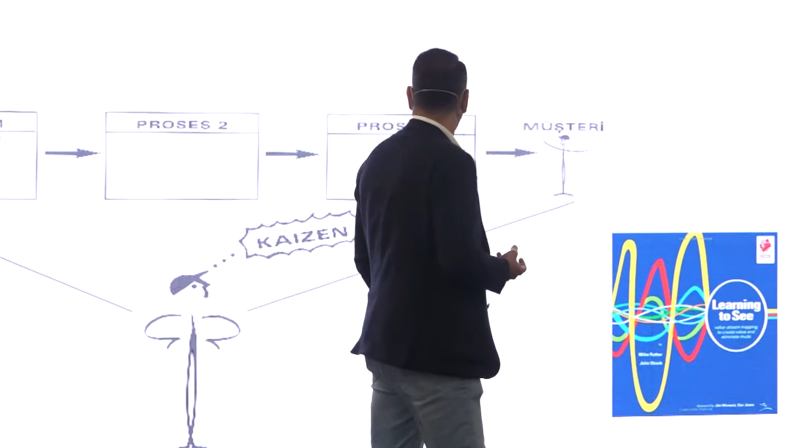Where there is a product for the customer, there is a value stream, as the Learning to See book says. Some operations are non-value added and some are value added. If you can cut some non-value added operations, you can fix your cost, your efficiency, and your quality.

Here I will mention three different aspects of efficiency. First is balancing, second is reducing the 7 wastes, and third is work ergonomics.

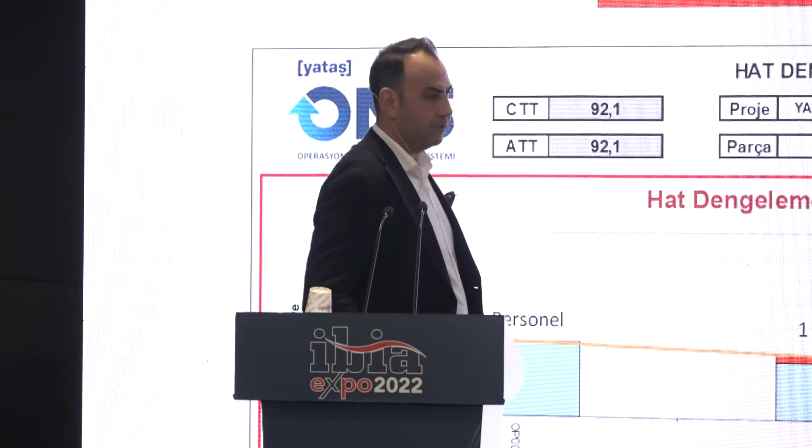So you have to look at all of your operations in detail and find what you can do. For every step, every second, you have to see, measure, and analyze the opportunities to cut or combine. Here you can see a balancing sample. Before balancing, there is a small operation with 5 employees, and you see the unbalanced points on the graphic. You have to look, as I said, in detail.

After balancing, you can see the operation goes from 5 employees to 4, and the cycle time to actual takt time ratio is 100%. So you can cut 20% from your labor cost.

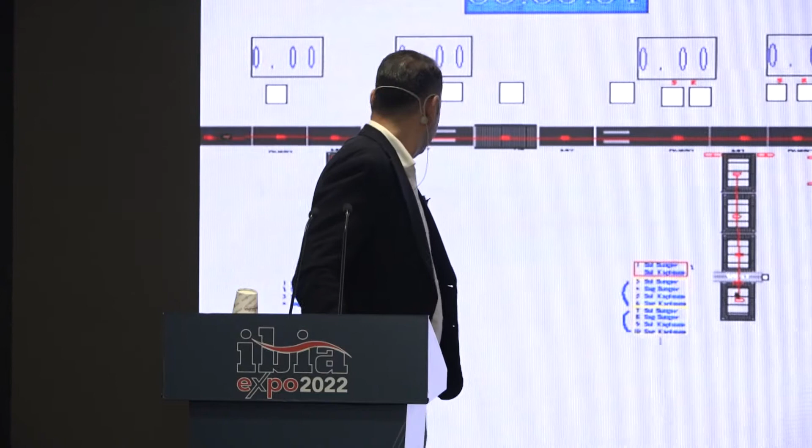Another point: yes, we said Human 5.0, but you can also use digital tools to understand and be sure you make the right balancing of your operations. You can use different software like Rockwell Arena or Visual Components. Some of them have really nice HMIs.

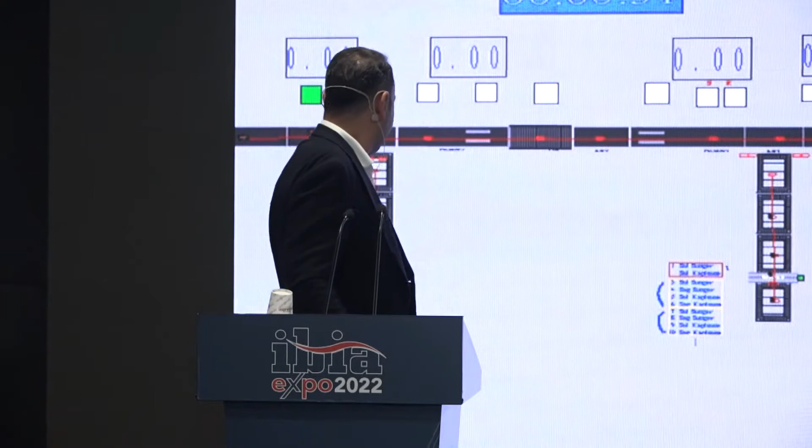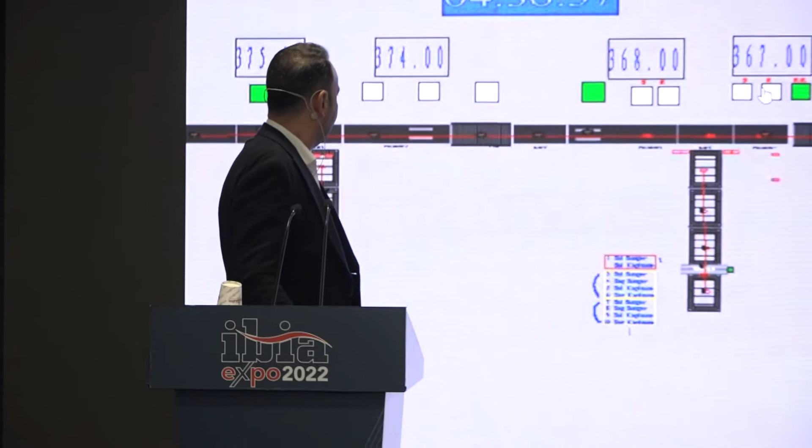This is the first simulation of our mattress line. We measured before we designed our assembly line, saw how many mattresses we can produce, and after that we signed the contract and went on to production. As you can see, it shows how many mattresses you can produce in an 8-hour shift.

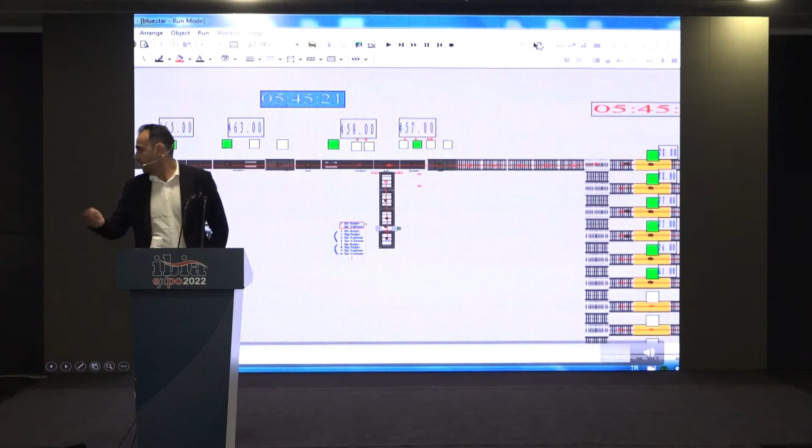The most important point after the simulation: the loading has to be equal or close for every workstation.

The second point is reducing the 7 wastes. It's a main principle of lean production, or the Toyota way. Too much inventory is a waste. Waiting is a waste. Defects and reworks are waste. Overproduction, overmotion, transportation, overprocessing, all of them are the 7 sins for production companies. So you have to look at where you are losing, which points make you wasteful and inefficient.

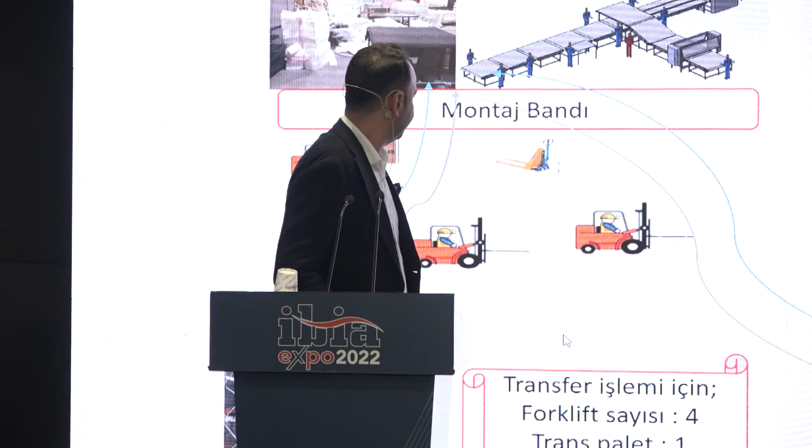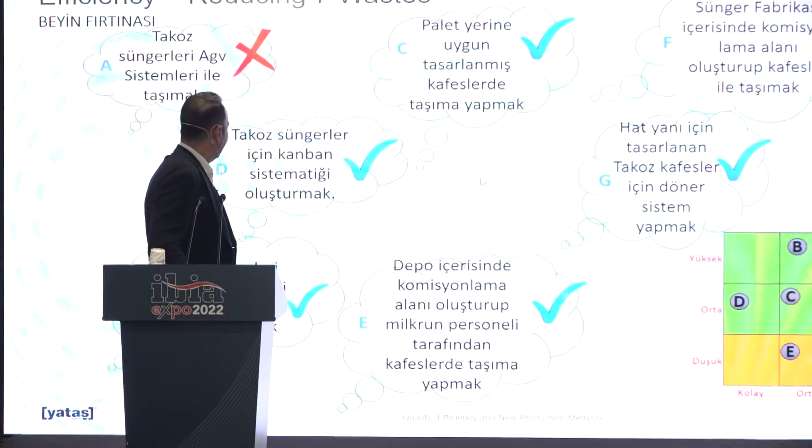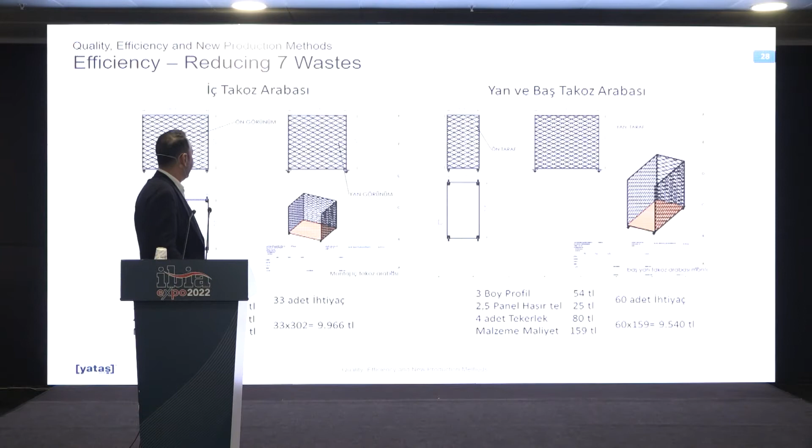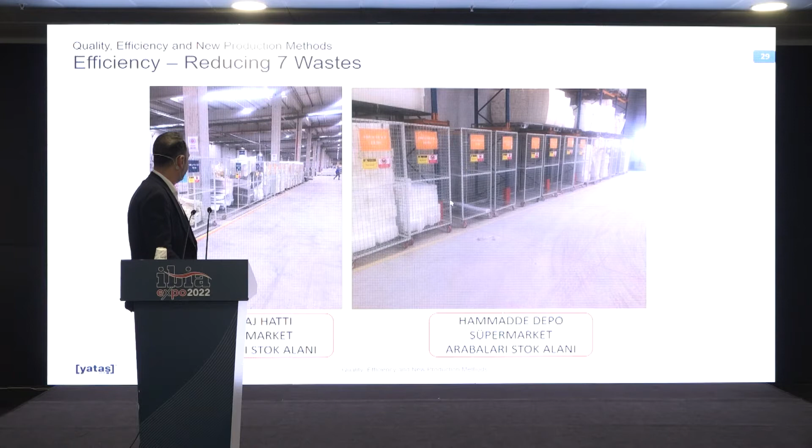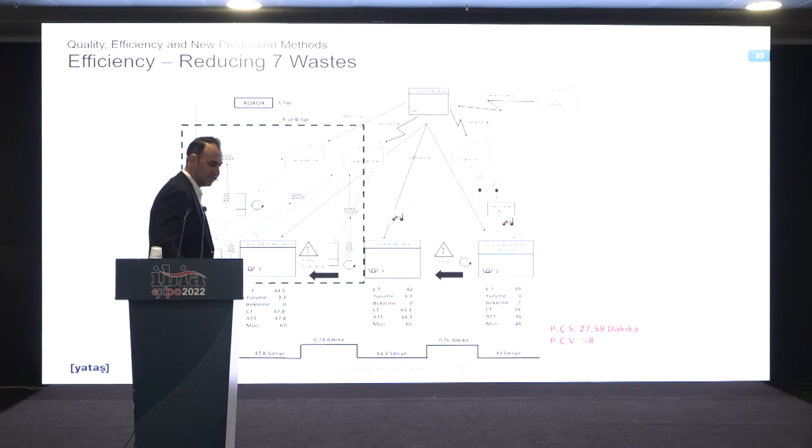At the second point, now you are seeing the value stream map for the current situation, and here is the next situation. They changed the system completely from push system to pull system. Another important point is the standard job: it means if any operation is made by anybody, every time, at any time, everybody has to do the same thing in the same way, in the same method, and at the same time. So it always aims to reduce the differentiation and standard deviation from person to person, operation to operation.

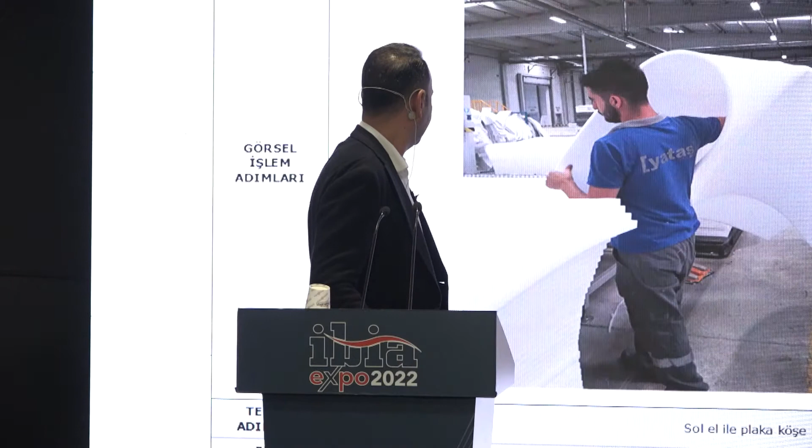And now you are seeing some of our standard operation sheets. For example, you can see what is the tip point to do this operation, where they have to be aware about the operation, what is the critical point, and what time they have to start and finish this operation.

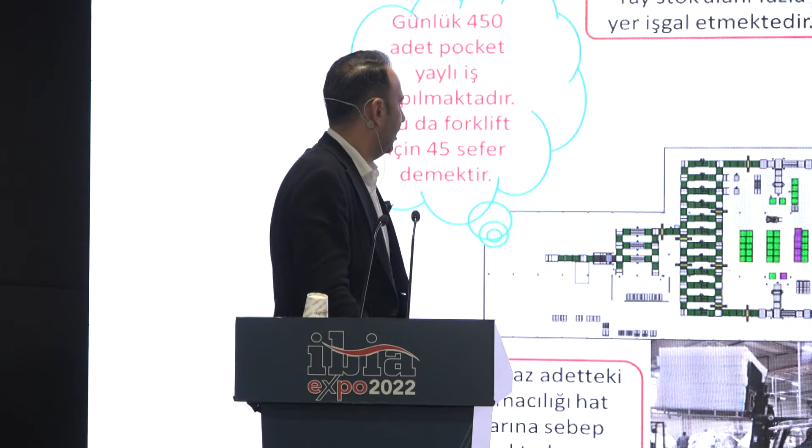Another point, they also saw a waste to move and handle the roll pack pocket spring units to the assembly line. You see the spaghetti diagram. They also made brainstorming again and found a solution to integrate a bale opener and roll opener to the assembly line. They added some extra conveyor belts to fix the operation at the same time. And you see the efficiency loss, the waitings decrease to 70% less.

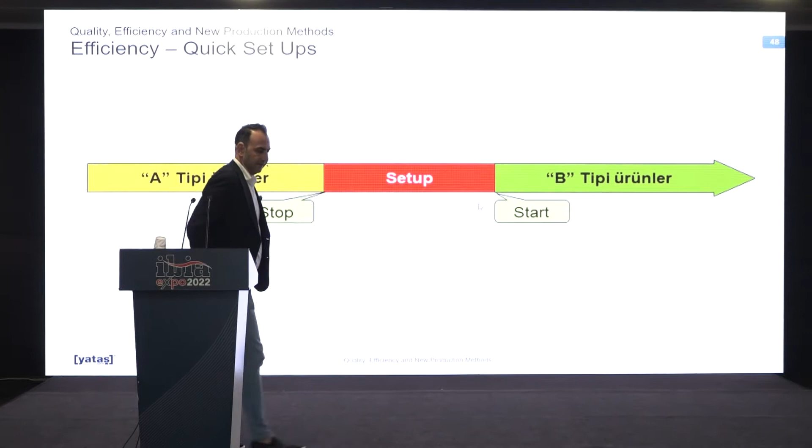The other point is, as mattress producers, all of us are serving many different markets, and all the markets need different types of mattresses. Some markets need inner spring mattresses, some need foam core mattresses. This means much more SKUs, much more models, means much more changeover and much more setup. And every setup, if you cannot do it in short time, means a break and unplanned stop.

Now I will show you a video from Formula racing. First, you will see the first video from the 1950s, and after that, you will see the new version of the pit stop at the Formula from the 2010s.

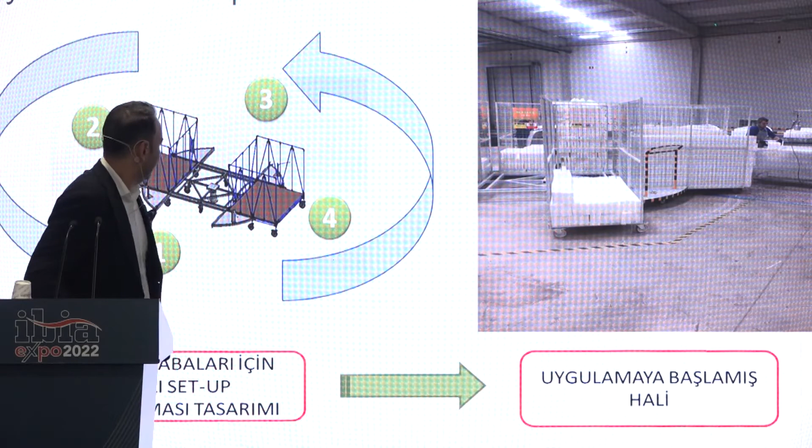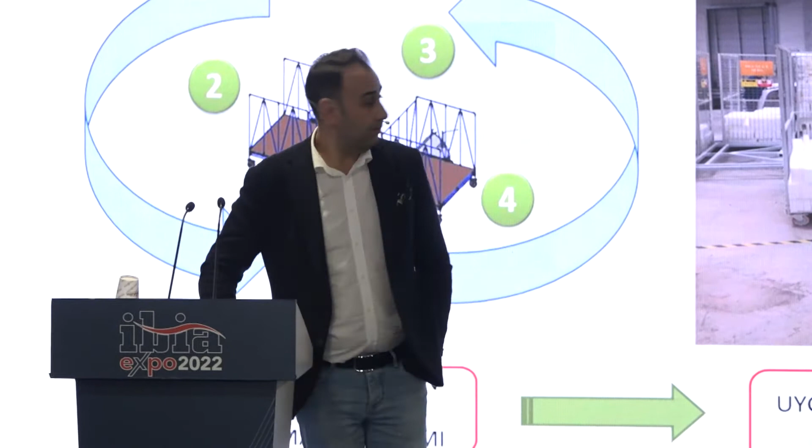So reducing the setup times and changeover times is really critical for our industry because of our product range and our product variety. We have to change from one model to another batch in seconds. So that's just a simple example of what they are doing at Yataş.

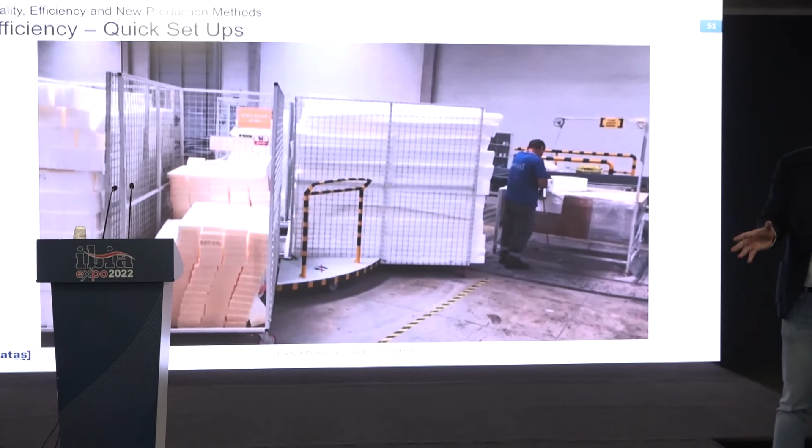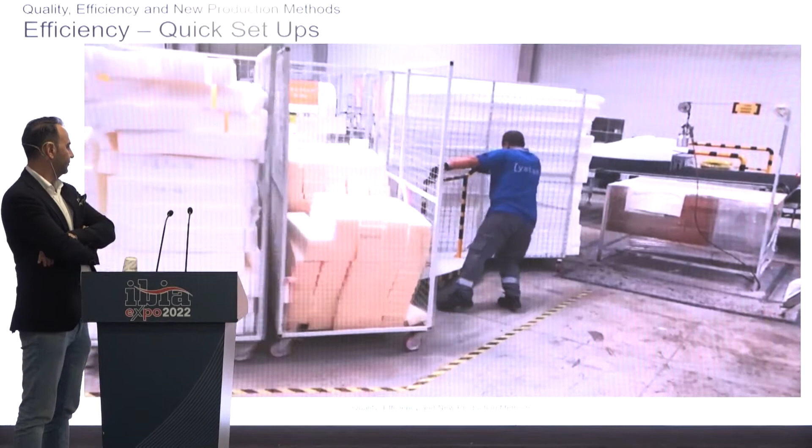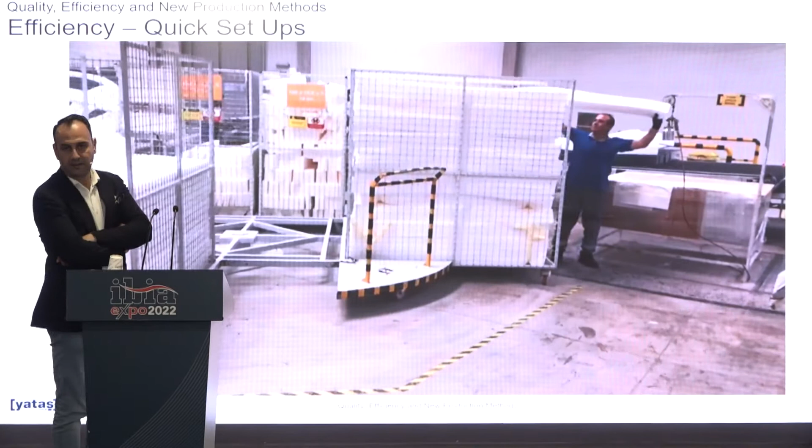We are producing 100% foam-encased mattresses. This video shows one-piece flow and also shows SMED, single minute exchange of the dies. Now he's preparing the mattress side rails, and after that he's changing to another model, another size, so he has to use other side rails. Now he switched the other batch to the other size. It's easy and lean.

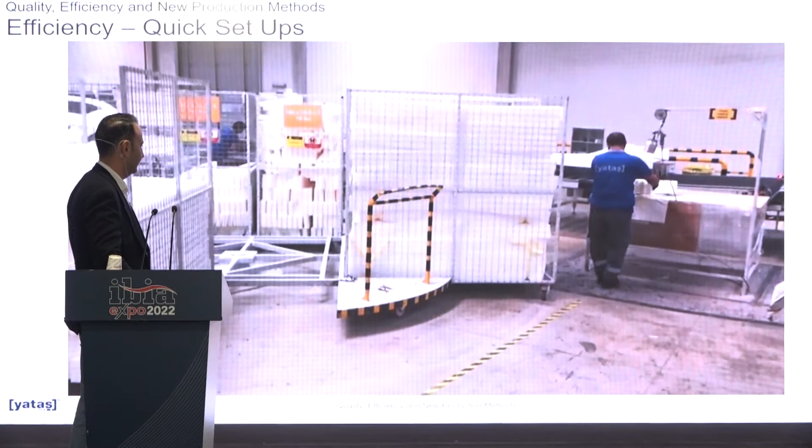Another point is we are working with really expensive equipment, and every piece of equipment has too many different electronic sensors, controllers, mechanisms, and mechanics, and you have to care about the condition of your machines for maintenance.

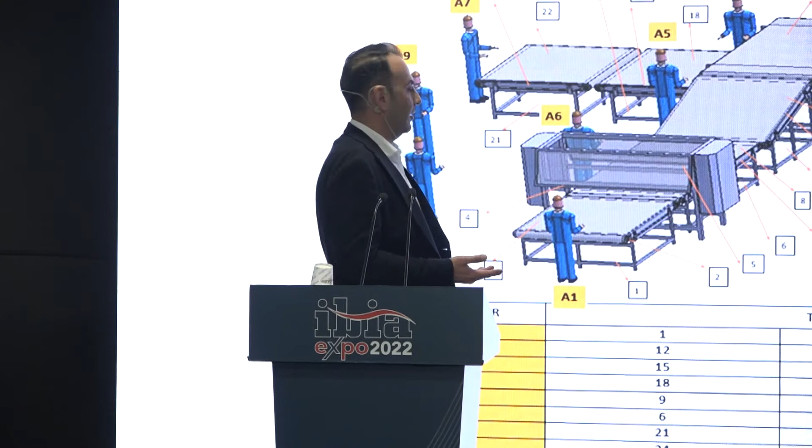With unplanned stops, breakdowns mean unplanned stops, and that means efficiency loss. So to reduce the breakdowns and broken parts, some sensor issues, if you want to reduce them, you also have to clean your machines, control the critical points of your machines, tighten some of the screws, and make regular lubrication to reduce breakdowns.

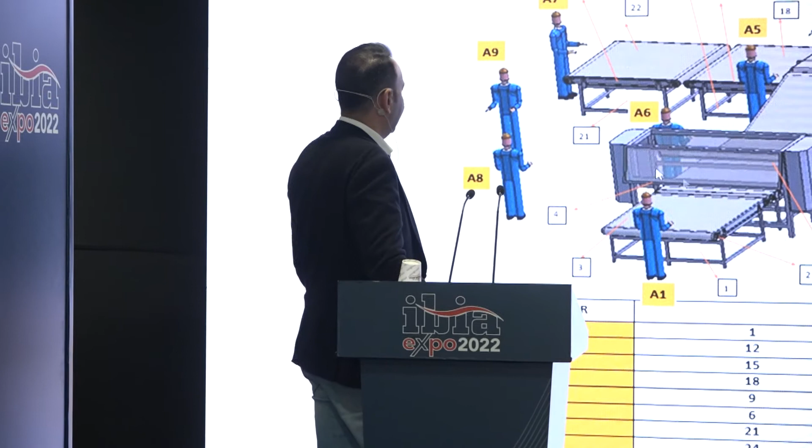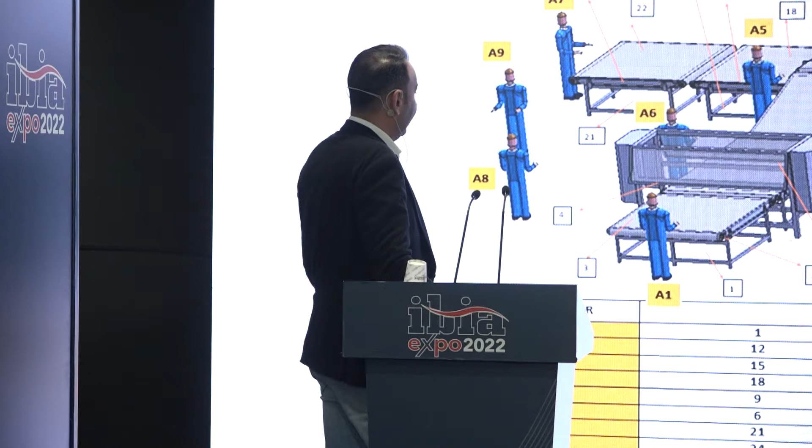And now, at this assembly line, you are seeing every person has a number, has a code, and every person, every shift, at different days, has to clean different points, check, control, tighten, and lubricate different points at the assembly lines.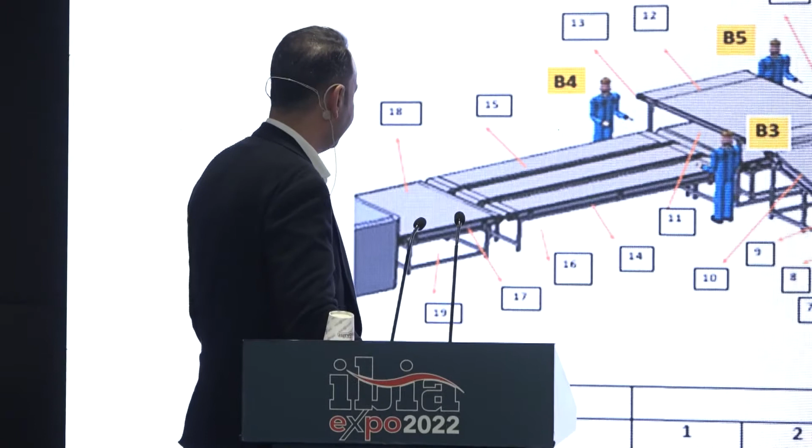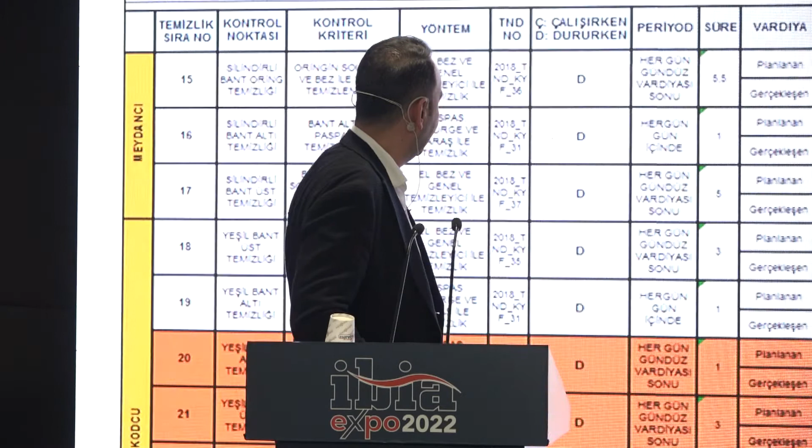We are detailing all these points, how they have to clean, what they have to use, and we are giving detailed one-point lessons. You see the trend of these timing lines, how that's going. And also another point is escalation.

If there is any break, if there is any unplanned stop, there is an escalation chart to inform at a path. Lord Kelvin says, if you cannot measure it, you cannot improve it. And Peter Drucker, the famous management consultant, says, if you cannot measure it, you cannot manage it.

Manufacturing execution systems and IoT, also Serkan mentioned at his presentation, are really important for us to see. We are collecting data from our production lines, and also another point, we have an andon button. If there is any abnormality, if the person sees any abnormality, he is pushing this button, and we completely stop the line. We have a horn and a lighting, and the supervisor of the line goes to that point and asks, how can I help you? We call it stop for don't stop.

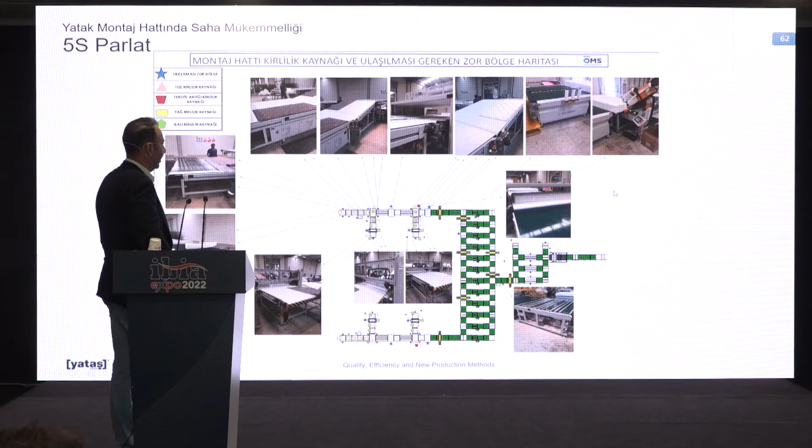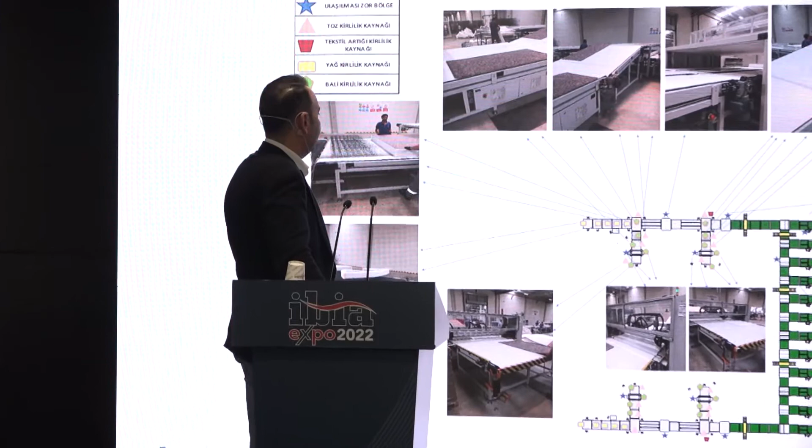Here you are seeing a map at which point of our production lines, what kind of dirtiness sources we have, and we are measuring how many minutes we are expending to clean these points and to control these points, and our aim is to reduce the source of the dirtiness.

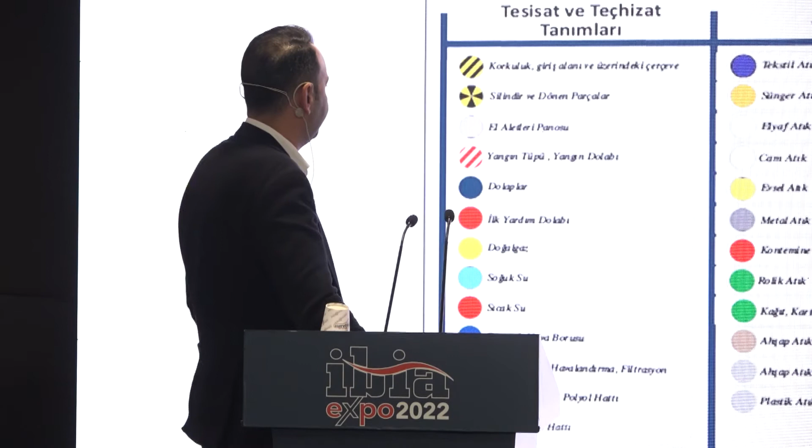Here is another example, and this is our visual plant standards. Some of the examples from our 5S applies.

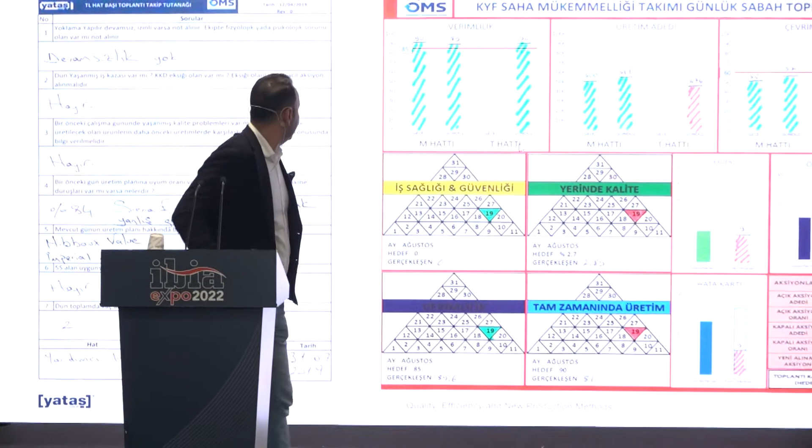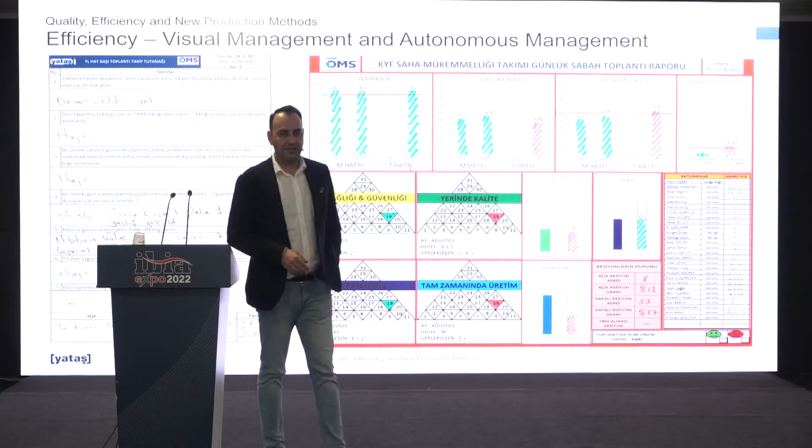And also another point, as I mentioned before, visual management and autonomous management. We are collecting data and we are looking at reports and talking about it, what we can do together to solve and do it better.

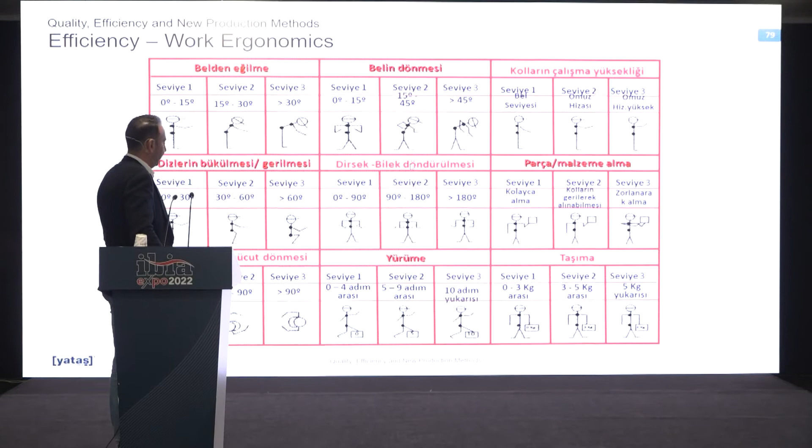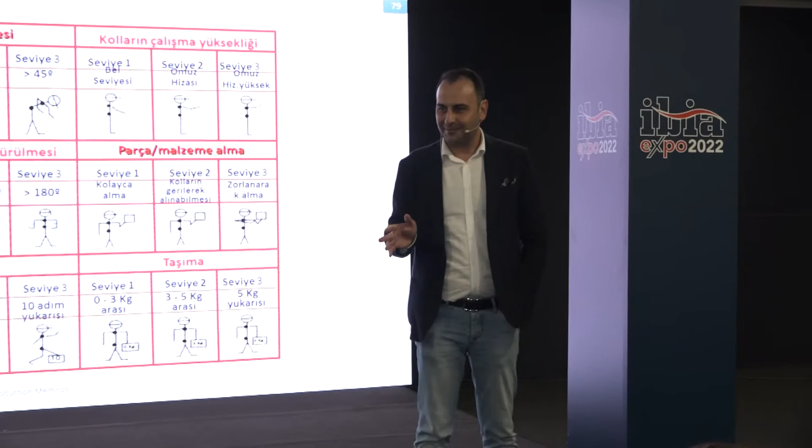And another point is work ergonomics. Yes, as the mattress industry, we are better than the furniture industry. We have much more automation, much more automated products and machines. But we are still using too many labor and manpower. So ergonomics are so important.

You also have to look at all of your operations from the ergonomics perspective. As you can see from this chart, every motion, every position has a hardness point, and you have to look at your operations.

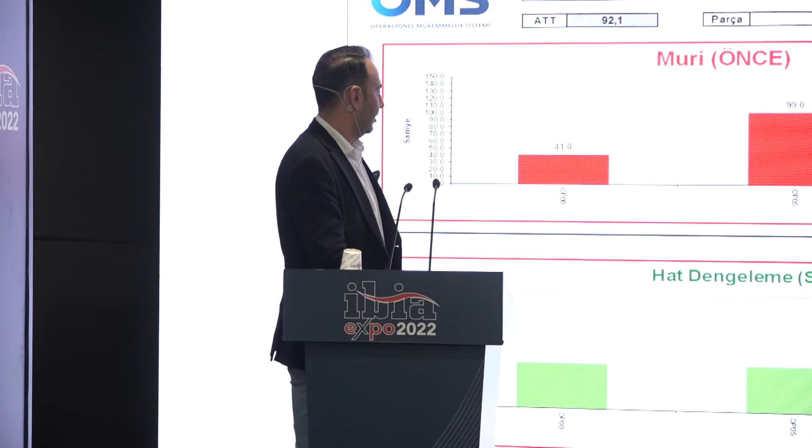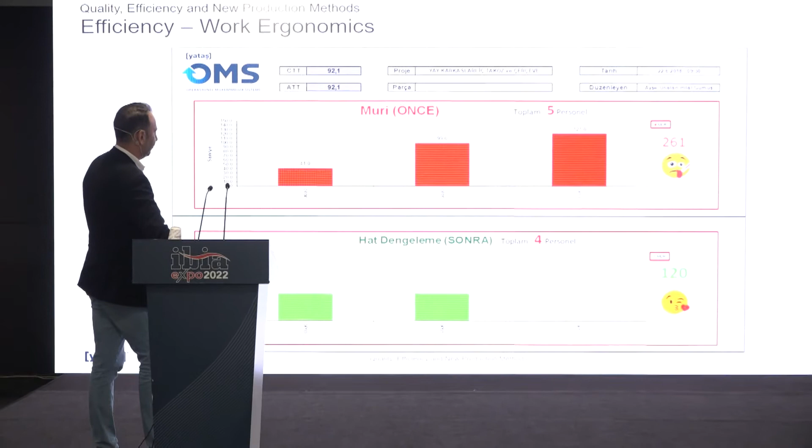This is before the improvement. The total score for these three operations was 261, and after the improvement, we came down from 261 to 120, and we balanced the hardness of the operations at every station to the same level. We also eliminated the third operation.

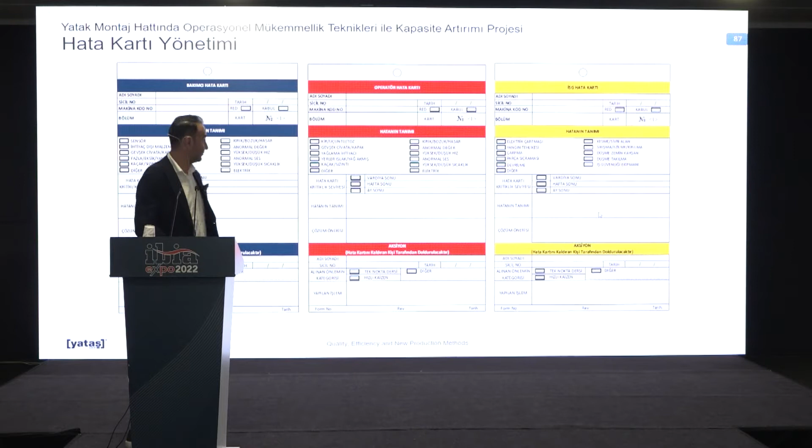Another point is autonomous maintenance, also called TPM, total productive maintenance. These are the fault cards. We have three different kinds of fault cards: the blue ones are for the maintenance guys, the red ones for the operators, and the yellow ones are about health and safety for the labor. These are the most important ones.

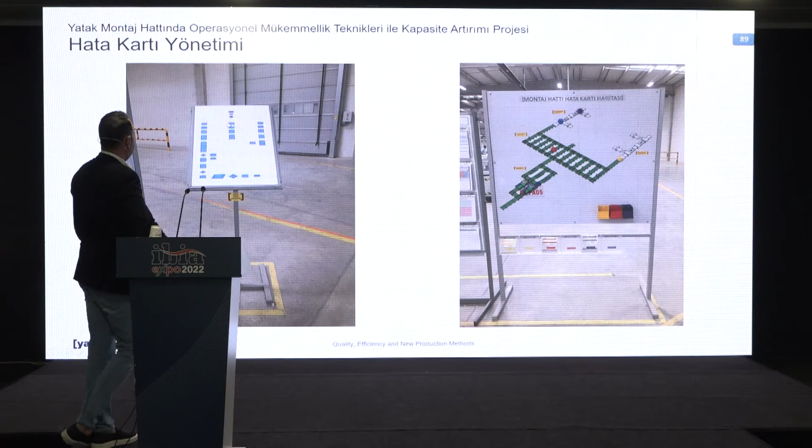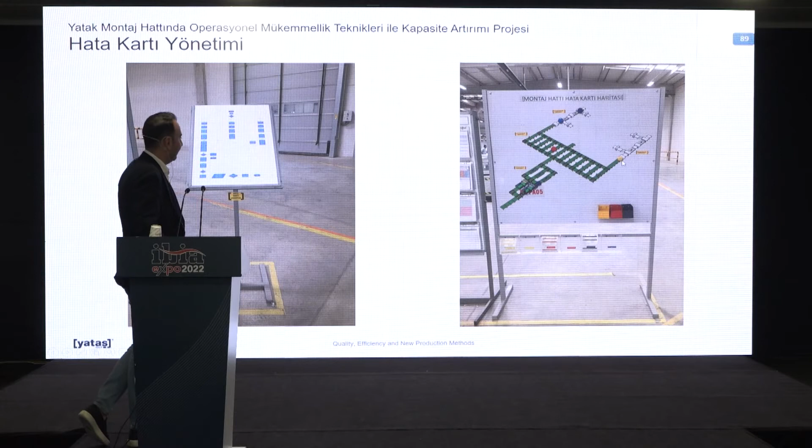We have to solve the yellow ones on the same day. We are using these cards, hanging them where we see the problem, and also pointing from the layout. Now you are seeing 1, 2, 3 maintenance fault cards, 1 operator fault card, and 1 health and safety fault card. This is when we hang the card and when we unhang the card, as you see in the graphics.

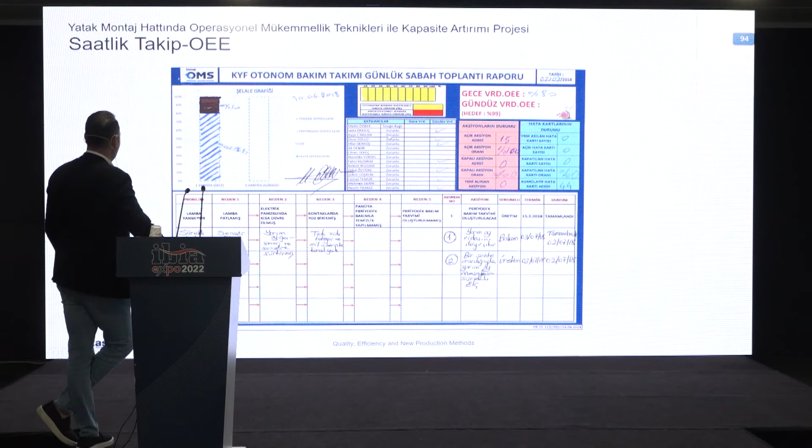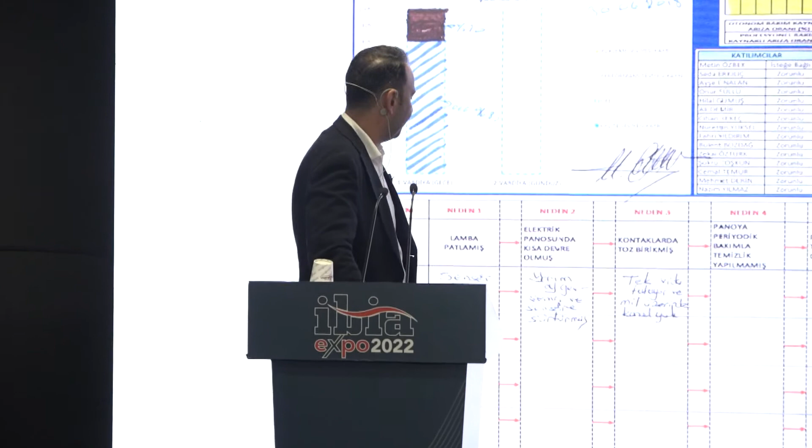We also have to talk about maintenance and breakdowns for the machines. We are talking every morning about every problem with the maintenance. If we had a problem, we always ask why 5 times. The aim of this 5-why analysis is always to find the real source of the breakdown.

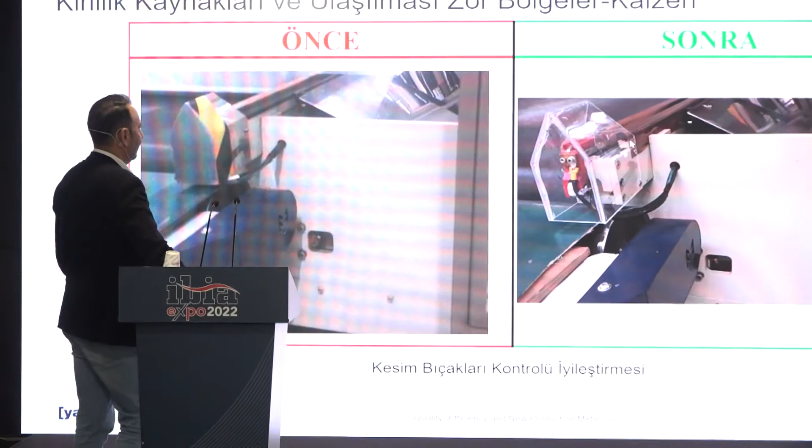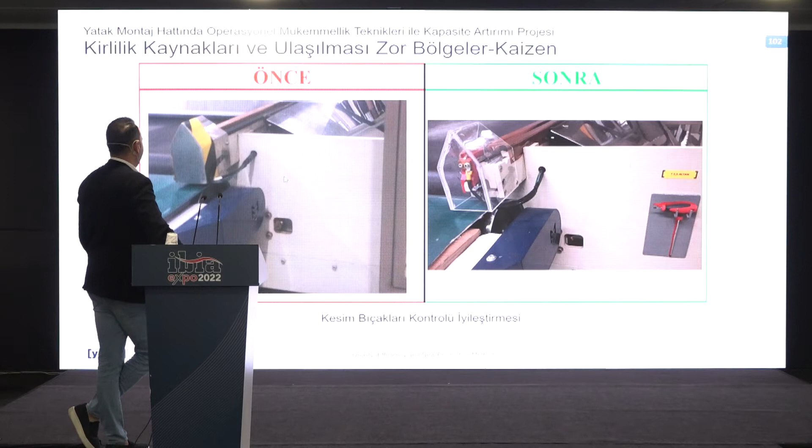There is another Kaizen. Before, we could not see the inside of the knife unit, and if there was a problem with the angle of the knife, we couldn't sense it before it became a problem. But now, if there is a problem, we can see it.

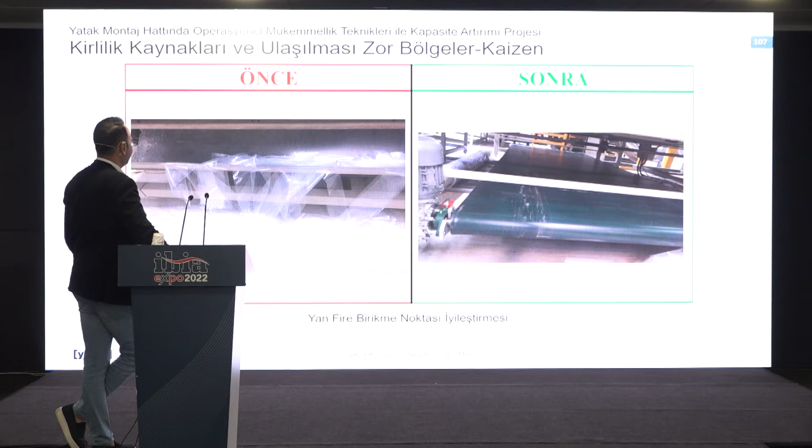This is another Kaizen to keep the bottom side of the machine clear. This is a Kaizen to collect the side waste of the polyethylene film.

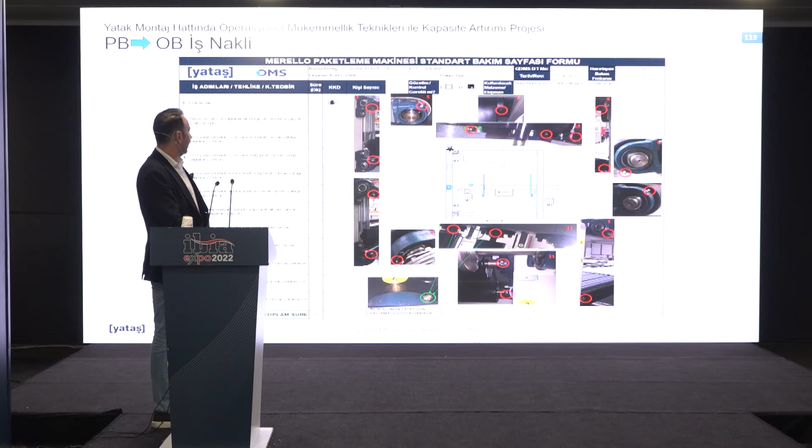Also, these are the standard maintenance sheets for our maintenance staff for critical machines and critical parts. If there is a problem at that critical machine, every maintenance staff is making the right operation as written here. And these show the lubrication points.

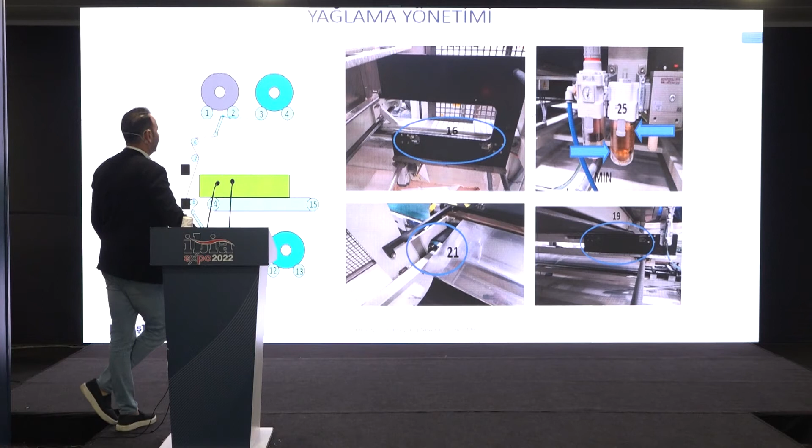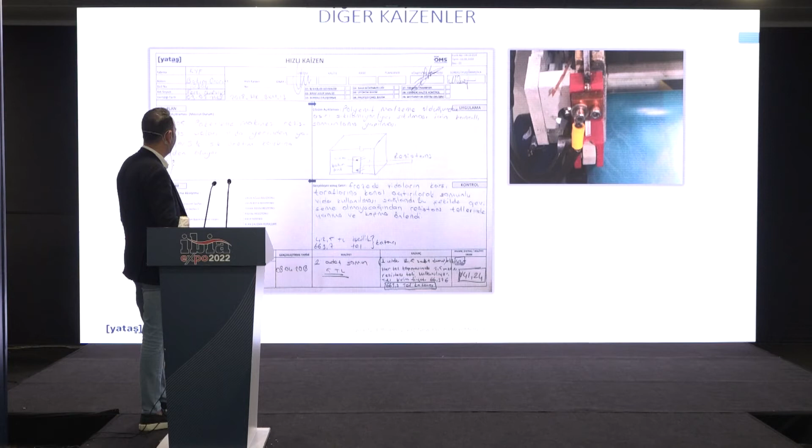And these forms show what the problem was, what the maintenance guys did, and the source of the problem through 5Y analysis. You see there was a problem with the resistance connection, and they fixed this problem with this Kaizen.

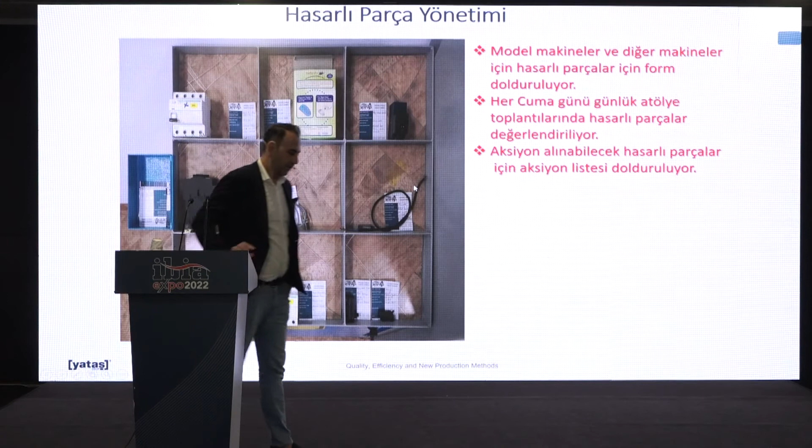Also, we are making some surgery operations on parts that we change after a breakdown, and we are looking at the part to see why it broke.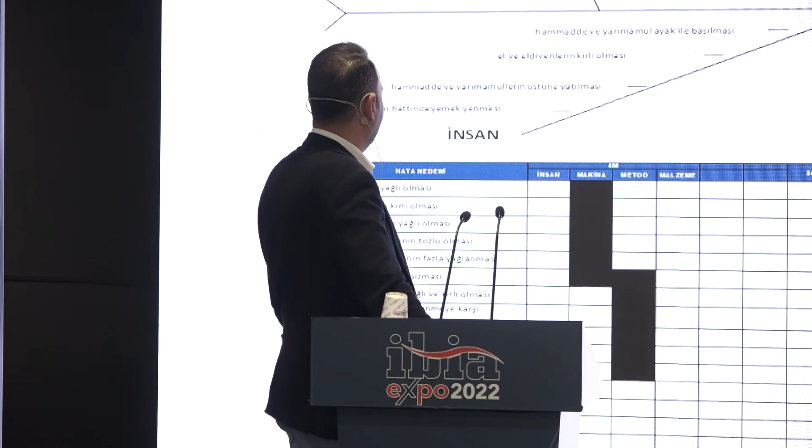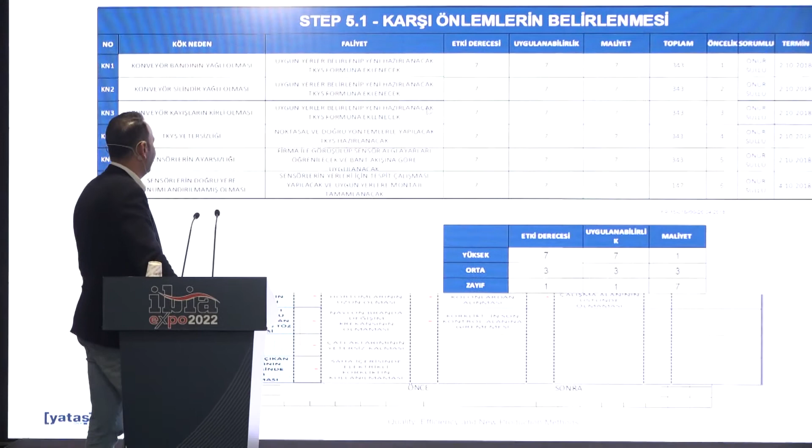These are the quality tools we are using. We always use the 7-step quality method. First, we define the problem. Second, we analyze the current situation. Third, we set the targets after the Kaizen, what we are aiming for, and after that we do cause and root analysis, finding potential solutions and implementing them.

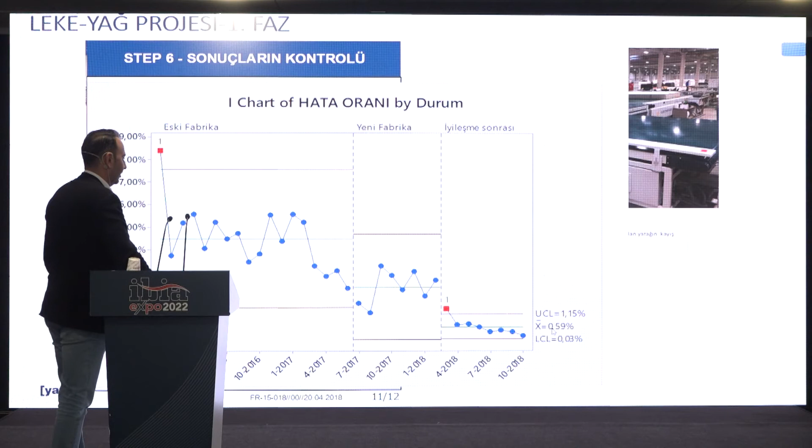After that we check if it's solved or not, and we standardize again with standard operation pages. For this quality problem, it started from 4.5 and we closed it at less than 1. This is the standardization.

Another problem about tape edge quality, another Kaizen project about tape edge problems. They always follow the same path.

You are seeing some improvements to solve this problem. They added a guide for the tape edge operator here. They changed the looper, they changed the needle, and fixed it at the standard operation page. They changed the apparatus, and you see from here, from 5% to 1%, they resolved this quality problem.

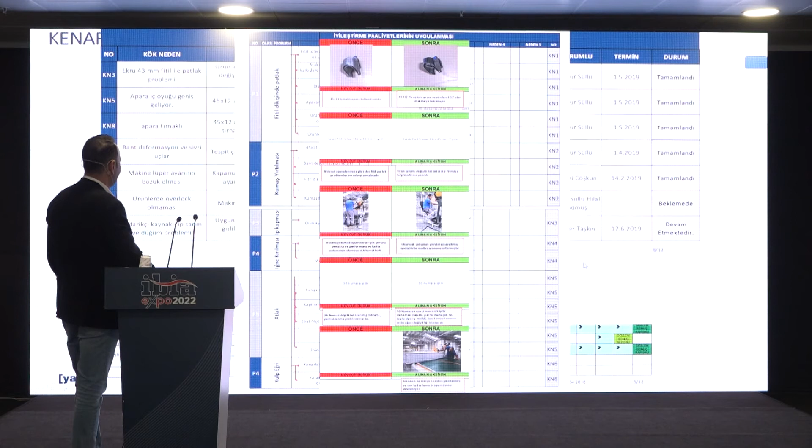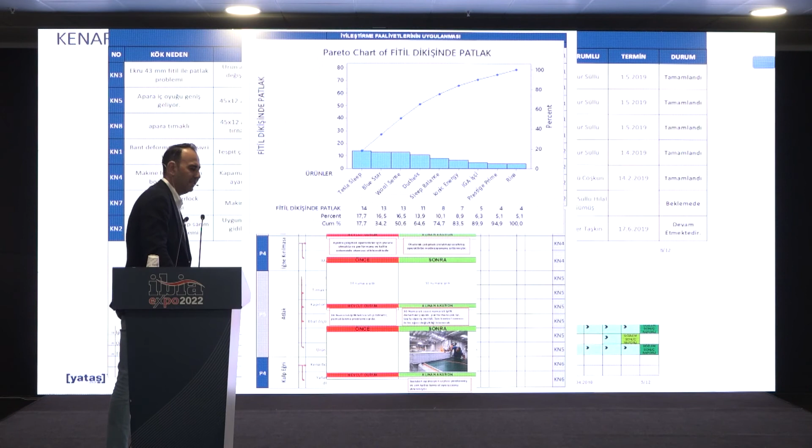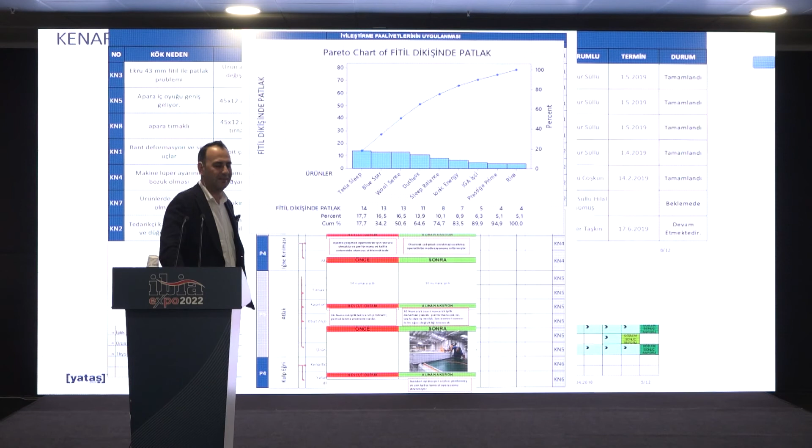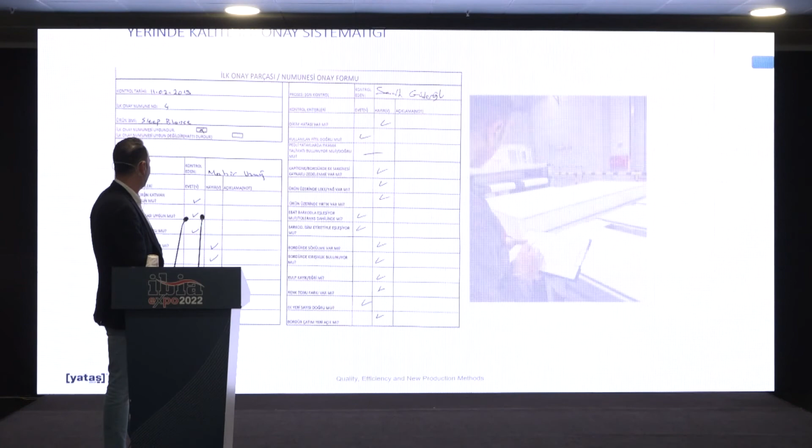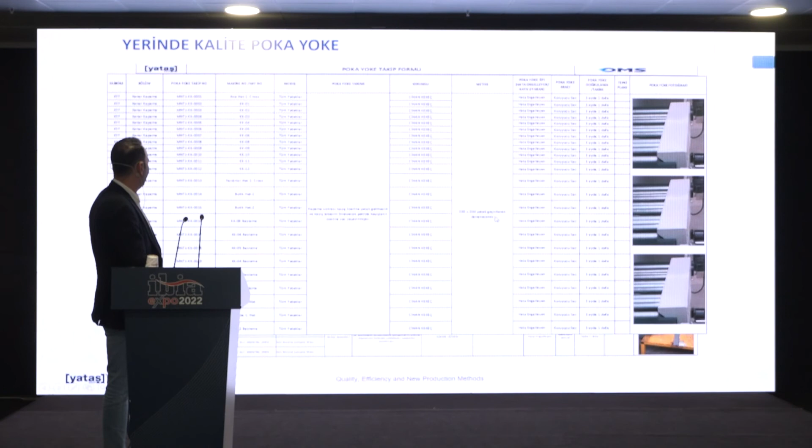This is some Poka-yoke samples. We always make maps of our Poka-yokes, and we always check whether they are active or not.

These are the limit samples, because we make quality control by the human eye, and somebody says this is okay, this can pass, and somebody says this cannot pass.

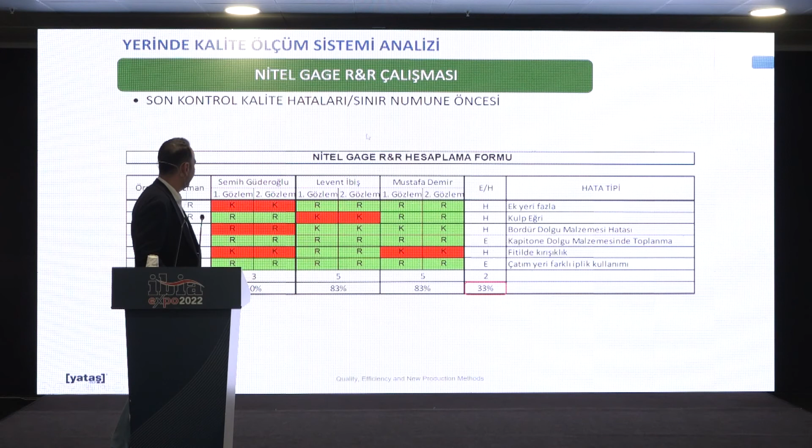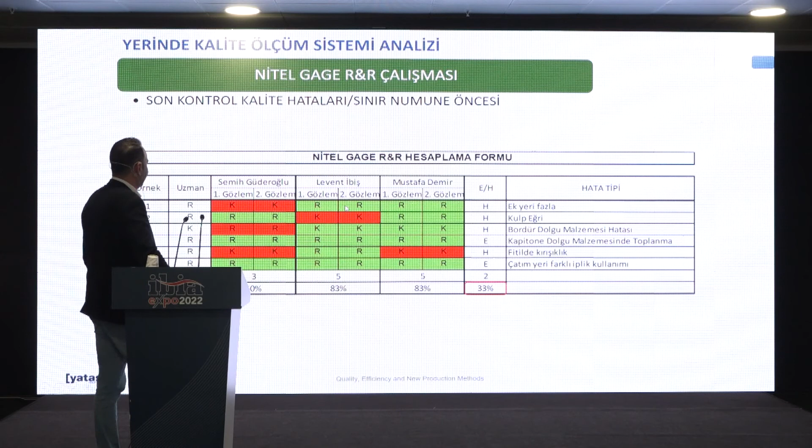We are also comparing the quality control operators' decisions about the samples, checking if they agree, and if there is a problem, we give education and fix their eyes about what can pass or not for that issue.

In 2017, we had a 12% rework ratio for quality at the quality control line. By 2019, we came down to 2.5%, and this year we are around 1.95%, below 2%. So we reduced our rework ratio 5 times with teamwork.

I think there's no question. Thanks so much.